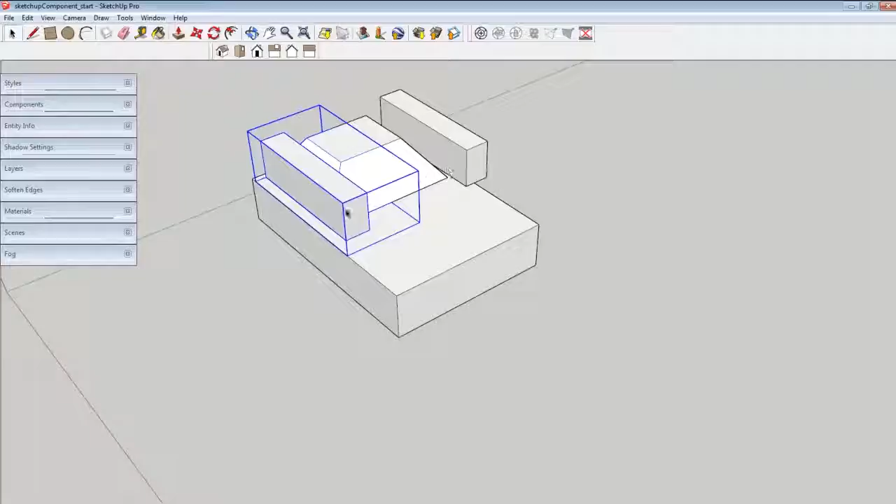Well, really all the cannon is here is a rectangle. So I'll just make a clone, put it to the side, and then I can position my turret however I want.

Now normally, once I've positioned it this way, it'd be a lot harder to work with. Just like in a perspective drawing, once something is off axis, it becomes more challenging. Well, because they're all components, each of those three rectangles are exactly the same.

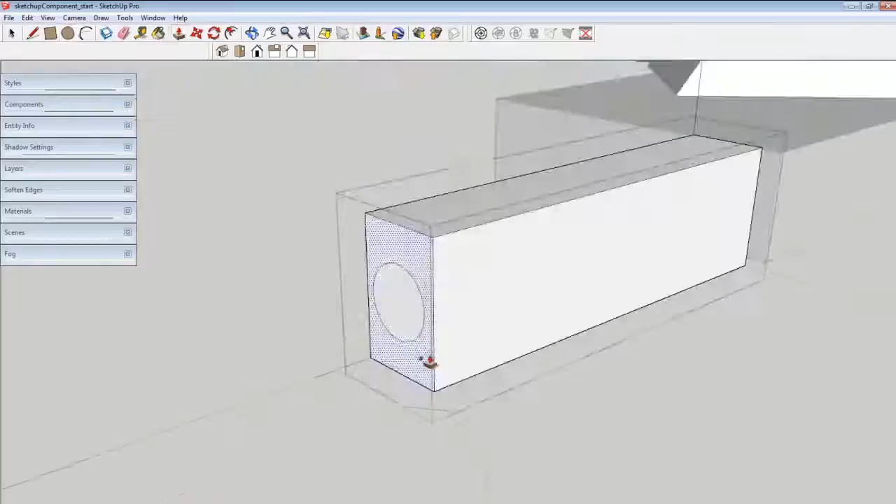So as soon as I modify one of them, the others will update along with it. So I'm going to work on this one that is perpendicular. Even though it's not on the turret, it's just sort of here off to the side, I'm going to make this my master cannon, and here's where I can do any of the modeling I want to do.

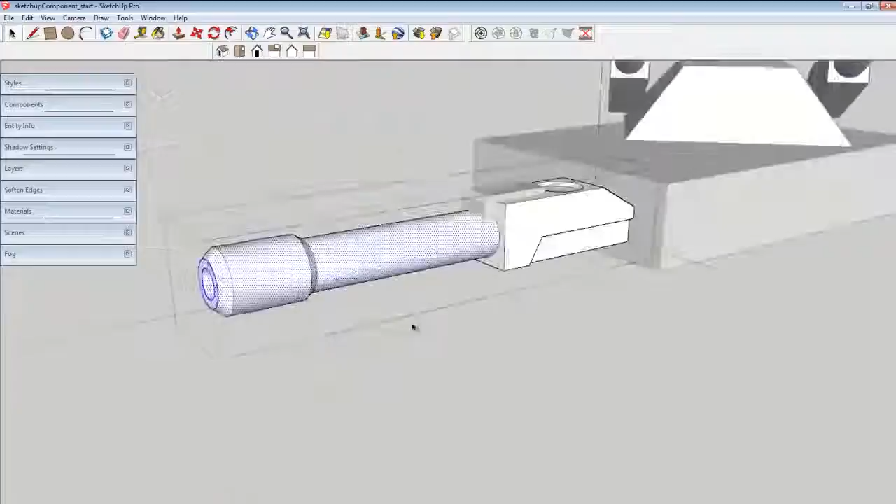I've sped up the footage a little bit, but you get the general idea. I'm going to be modeling cool shapes one time, and I'm modeling them right here, perpendicular to the ground, so it's very straightforward. Before too long, I have a finished cannon.

This is nice because I really only needed to work on the one and could put in whatever details I wanted to. But as soon as you back away, you can see that the other cannons look exactly the same. So this is great.

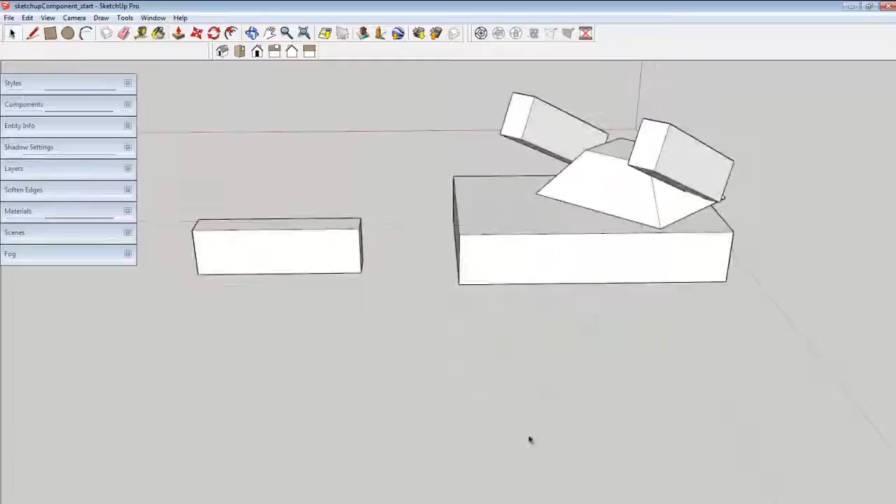Just like working on a drawing, you can first block in the proportions and then refine. But unlike a traditional drawing on paper, this automates the symmetry for me, and I don't have to worry about putting the cannons in perspective. It's nice to let SketchUp do some of the hard work for you.

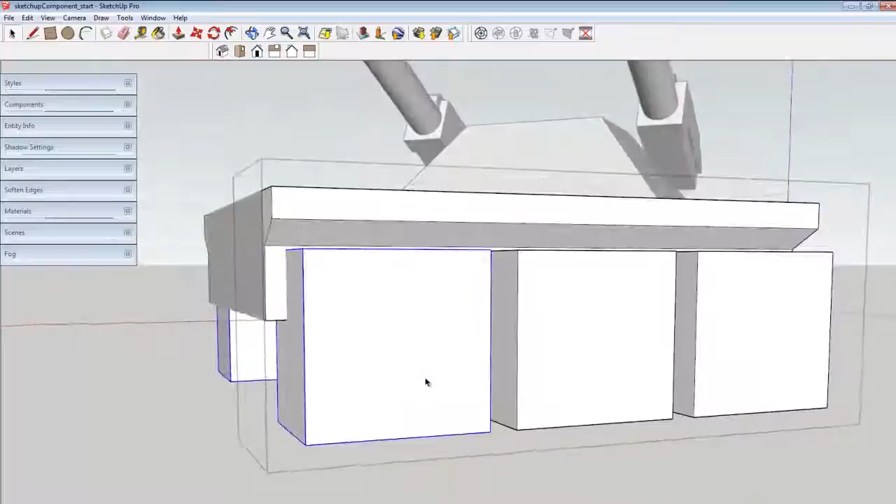Things like tires are extremely challenging in perspective. Well, here I've just blocked in a simple rectangular prism where the wheel is going to go. All six of these are components, which means they'll all be exactly the same. So just like with the cannon, I model one tire to look the way I want, and all the others follow along. But in this case, I'm modeling one right on the model, not off to the side like before.

The more and more I use SketchUp in my workflow, I really love it. Because sure, it helps me draw in perspective more accurately. But beyond that, man-made objects are filled with repetition. Working in passes like this, just like a digital painting, is a great way to avoid getting bogged down with detail. So I'd recommend two things.